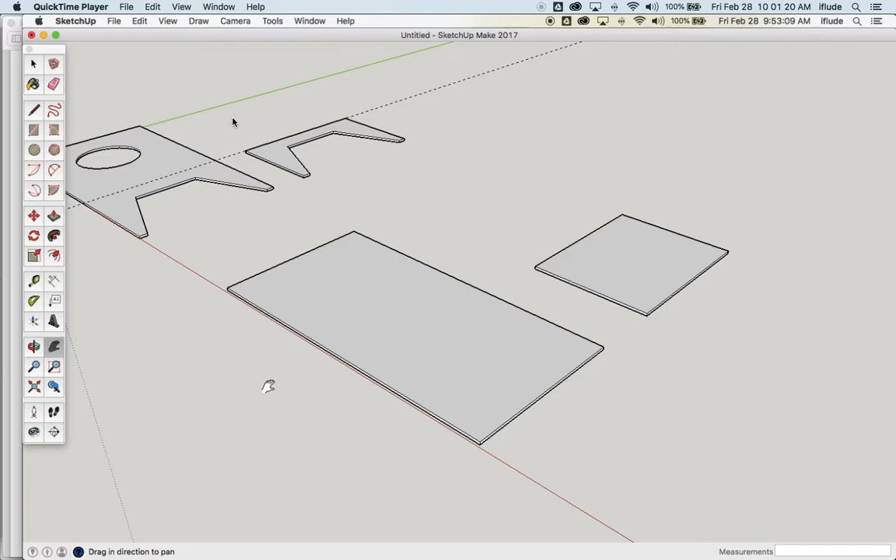This is the final video, and I'm going to show you how to use SketchUp to assemble all your parts and make this chair. In the meantime, I've now drawn this part, which is just a rectangle - I don't think I need to explain how to do that. That's part 3, which is 550 by 491.

Before I assemble these pieces, the first thing I need to do is make sure they're all components. Now that's a component, and you can see the difference when I click just once - when it's a component, the whole thing selects; when it's not, just a surface selects. So I need to make this into a component by triple clicking or selecting the whole thing that way.

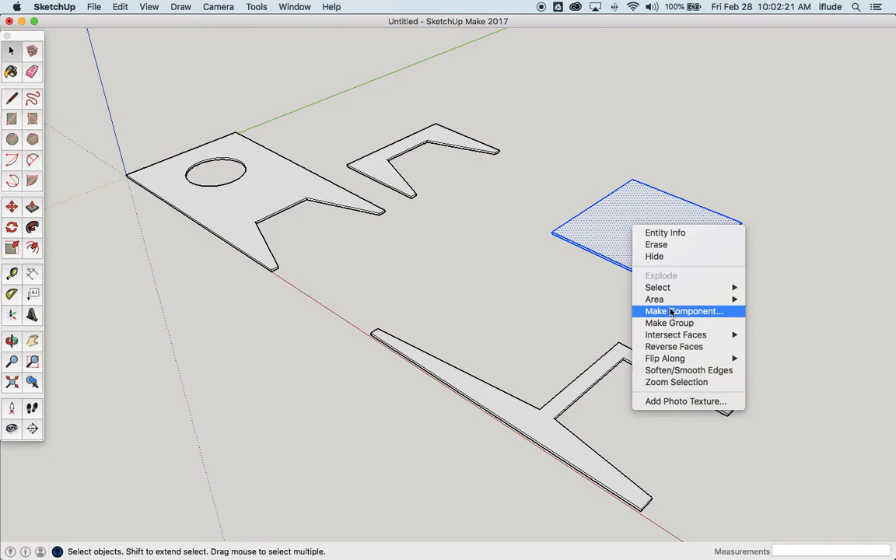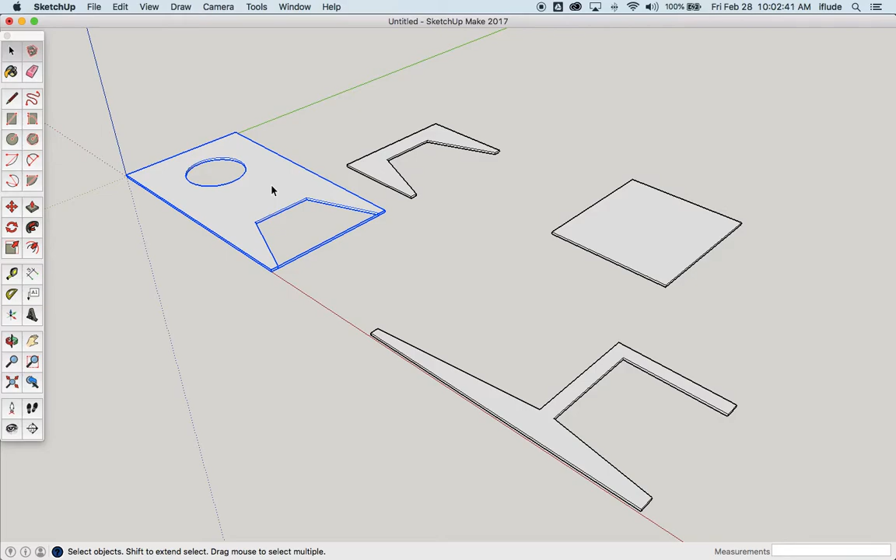Right click on it, control click on it, or use this button here - either way, you need to make it into a component. All of those different things do the same thing. This one here, same thing, needs to be made into a component. Good, so now all my parts are components, so I can safely put them together and not worry about them sticking and not being able to be taken apart again.

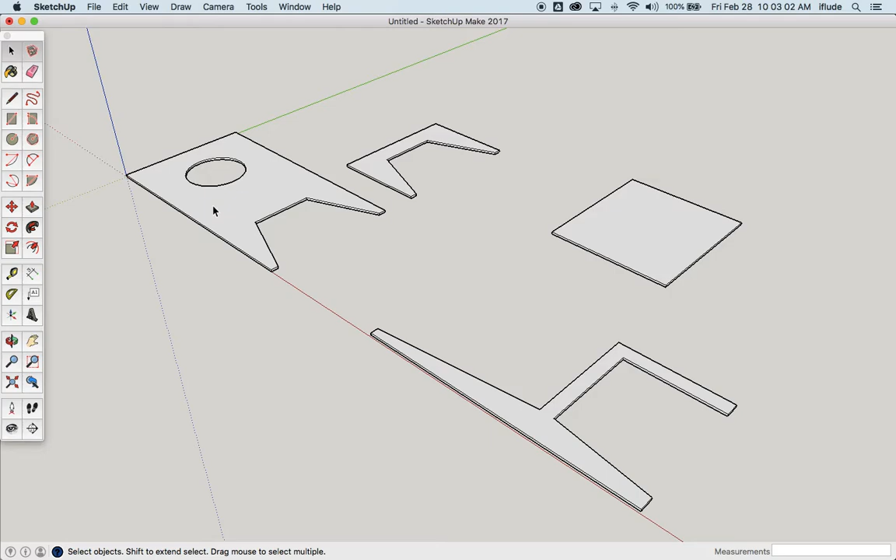I first need to get them into a situation where they will fit together, because they're all laying down right now, so I need to use the rotate tool to stand them up. So this one's the first one. I'm going to use the green axis to rotate it up by 90 degrees, like that.

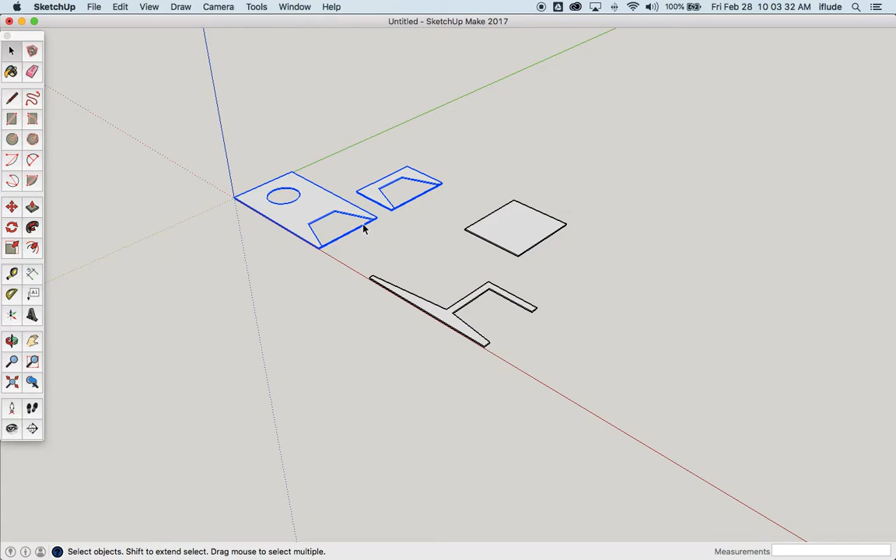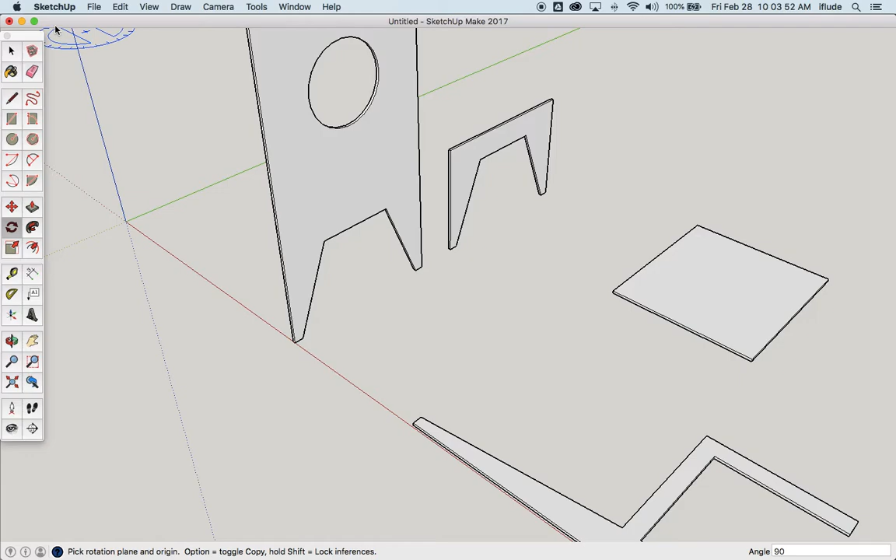Actually, if you want to, you can also select multiple entities. All of these three - actually that one probably best not, but those two definitely can stand up together because they need to be in the same plane. So again, use the rotate tool, choose the green axis, and hit the left arrow on my keyboard to do that and type 90 so it's accurate. Hit enter, and now they're both standing up in the correct orientation.

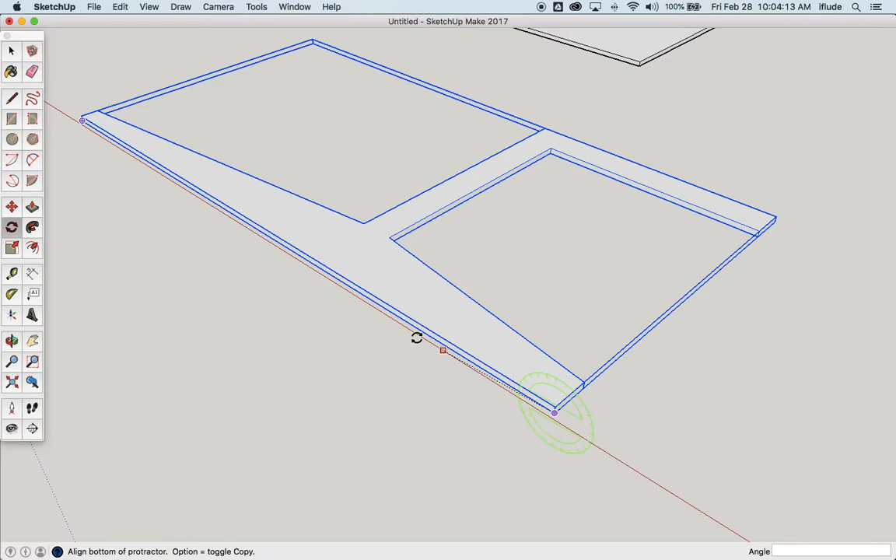Same thing here. The reason I didn't also stand this one up using that same process was because my center of rotation would have meant it went down here beneath. So I'll do the same thing, rotating in the green axis, hit the left arrow to change my protractor to the green axis and type 90 so that stands up. Now this one needs one extra rotation because it needs to turn by 90 degrees in the blue axis.

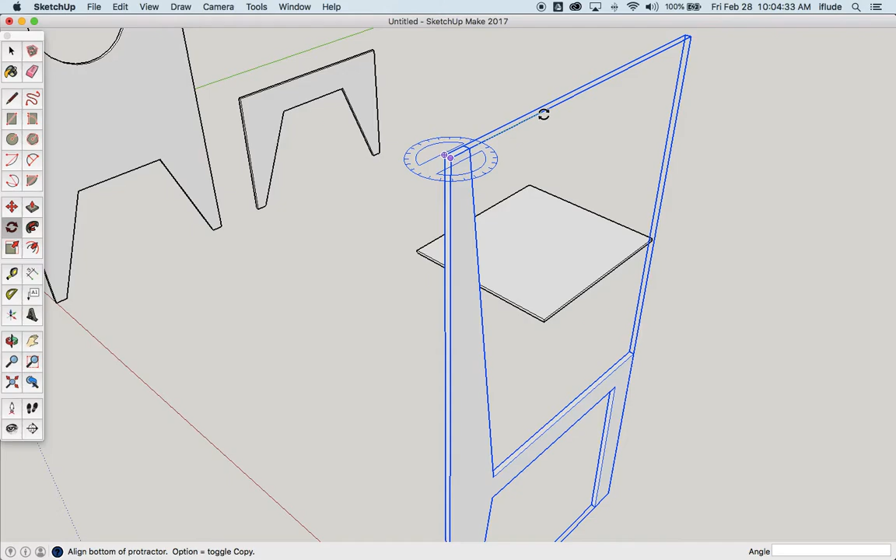So blue axis - click, move away, and just pull it in the direction you want it to go, then type your angle. And now I have that. So what I'm going to do now is briefly have a quick look at the booklet.

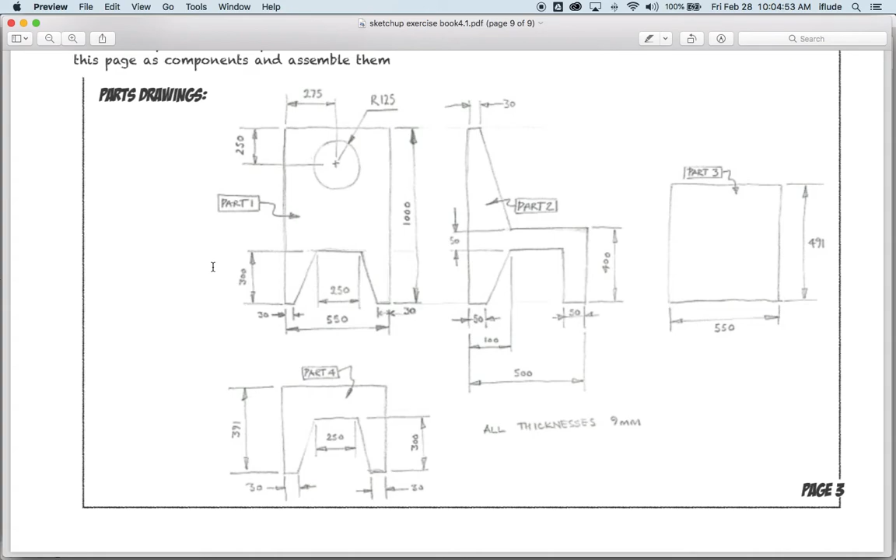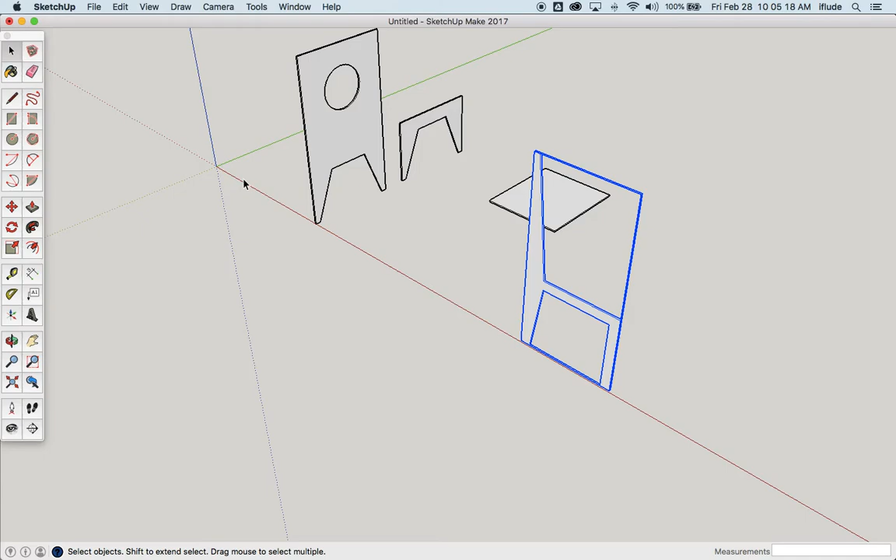Selecting this piece, moving it first roughly in the area where it needs to be - that might even be right first time. Well actually it's not, because you can see there's something happening in SketchUp that can't happen in real life, and that's two pieces actually occupying the same space. So I need to be careful and make sure this is actually in the right position.

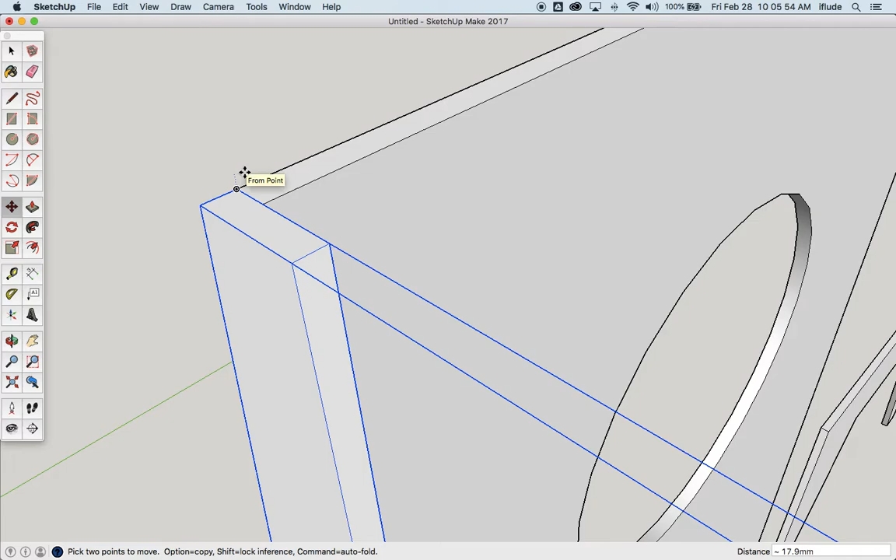So we do that by picking it up by a corner and then locking or snapping that corner onto the other corner. You've got to think a little beforehand to make sure you pick it up by the right corner so you can snap onto something. But basically that's a really easy process.

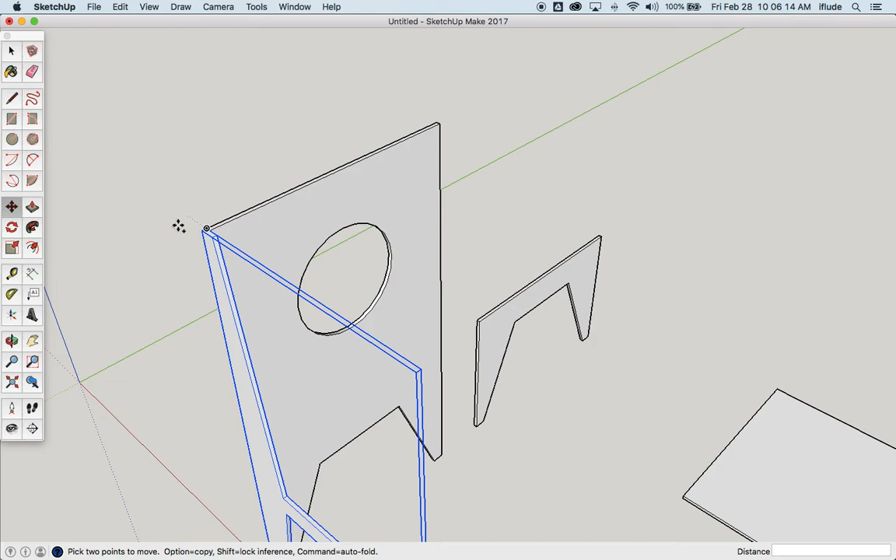Now I need two identical pieces here, and as you're all familiar with now, you can use the move tool and the alt or option key and then pick it up. This time I'm going to pick it up - I'll zoom in real close so you can see.

I'm going to pick it up by that corner, make my copy - you can zoom out at the same time while I'm making the copy. Move it just over here because it's a little off my screen. Then move my view so I can now pick it up by this corner and snap that corner onto there.

Right, then finally, all I need to do is grab the seat, and I just need to check which of these dimensions is the correct one. I know that that distance - I'm pretty sure it's 550. Yes it is. So the side here that's 550 needs to be at the front, and that's also 550.